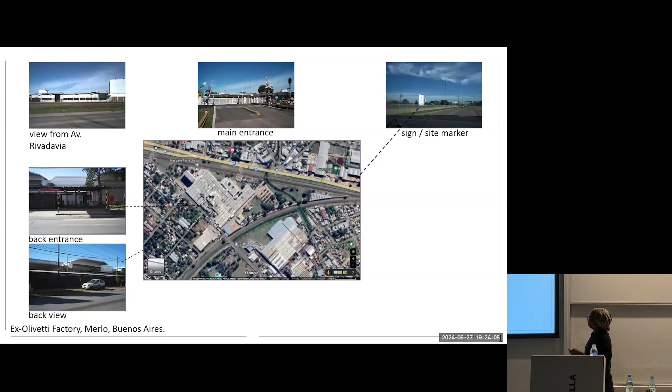And this canopy is part of the original design. So this is the employee's entrance with the bike shed next to it. And these are what we saw before. Just another diagram. And this is the picture of the sign. We found it on the front.

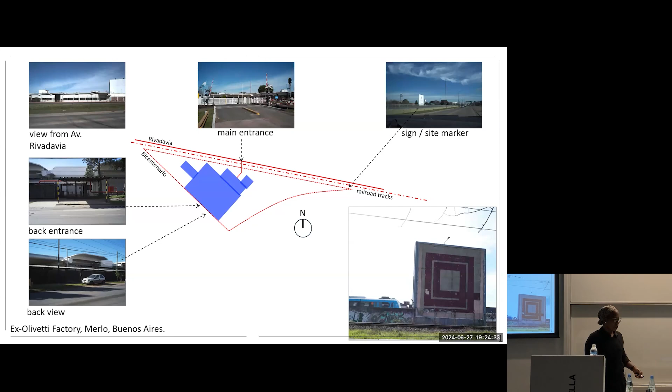You see it's been made into a cigarette advertisement on the back. The billboard is peeled away. You can see the Olivetti logo there again. So I'll come back to that point. So what was Olivetti?

We're talking about a company that was sort of singular, a singularity in Italy. The founder of the company, Camillo Olivetti, was born in the 1800s and established the company in 1908 after attending the Turin Polytechnic and traveling. He came to the US, to Stanford, to study electrical engineering. He had trained as an engineer.

He was also an ardent socialist, so even in establishing his company, he was at the same time meeting with people in the city and working through labor issues. The association of the typewriter they would produce with literacy and the empowerment of individuals was a theme that would run through the entire history of the company.

In 1901, his son Adriano Olivetti was born. He would take over the company in the 1930s. Camillo Olivetti was Jewish. He was from a family that had been in that area since the 17th century, I believe. And his wife was Waldensian, so a small Protestant sect. So they had a very strong religious foundation that they gave to Adriano Olivetti, who eventually became Catholic.

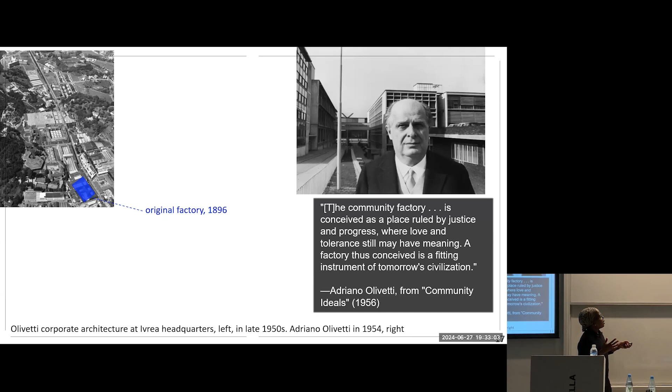This is Via Jervis, which was the street coming from the center of Ivrea and the train station, where the train went to Turin, where the factory complex would begin to grow. So between 1939 and 1962, Adriano Olivetti would direct a series of extensions to the factory, building more buildings. These were designed and built by Figini and Pollini, two architects practicing in Milan, associated with modern architecture.

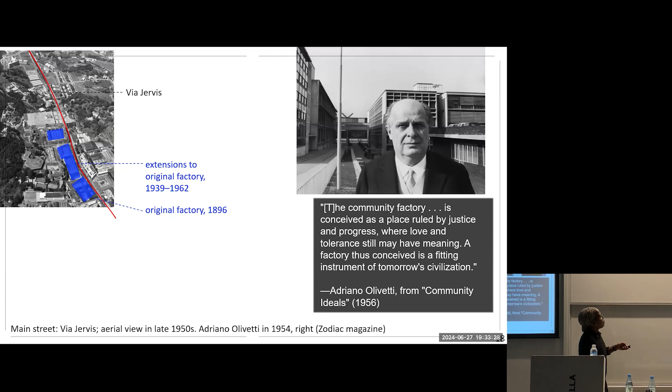But another part of Adriano Olivetti's thinking was that there should be buildings that weren't about production, but had social purposes. So the Mensa, or cafeteria, designed by Ignazio Gardella, a Piedmontese architect associated with the modernism centered in Milan. He was a fan of Frank Lloyd Wright, and so his buildings at this period had this 120-degree angle, and also developed a close relationship with nature. So this was a social space where workers could eat their meals and connect informally.

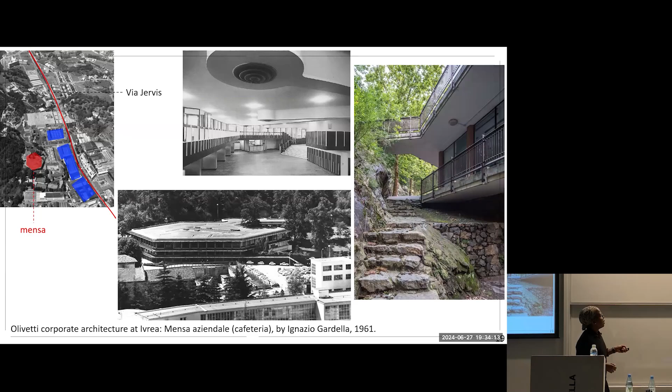In addition, there was a social services building, also by Figini and Pollini, across the street from the factory, and here there was healthcare, health insurance. There was a night school. There were offices to help people if they needed money and a loan or something like that. So it was a kind of service center. And there was also childcare.

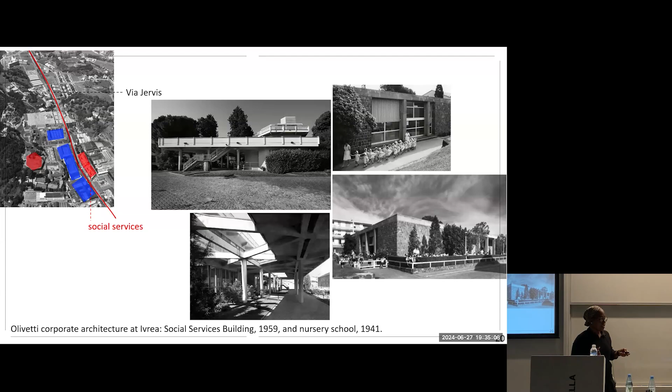Figini and Pollini, the same architects, designed a daycare center, I think somewhere in this vicinity, also not far from the factory. So the model of the Olivetti factory reflected Adriano Olivetti's ideas about community and provided this diverse set of services. And that's important because, at least, the brief for the Olivetti factory here in Buenos Aires would be to recapitulate that condition of support services.

So Olivetti had a presence in Argentina from the 1920s. Initially, there was a branch office in Rosario and agents across the country, and these were importers of the company's typewriters.

In 1932, this new company, Olivetti Argentina, was established. This was a period in which the company was establishing footholds in different places. So Barcelona, in the middle of the 40s, received their own kind of Olivetti headquarters factory. Great Britain, there would be one in England, one in the US, and so forth.

And by 1951, the idea was that machines wouldn't just be imported to Argentina, they would actually be produced here. And so an office was established in Buenos Aires, and they acquired a building at Ramos Mejia, which is still there, according to Google Maps. A single large factory building. This picture actually doesn't show the whole of it. It kind of extends down back in the block. And that would remain a place of production for many years, I think into the 1970s, even as the new factory began to be constructed.

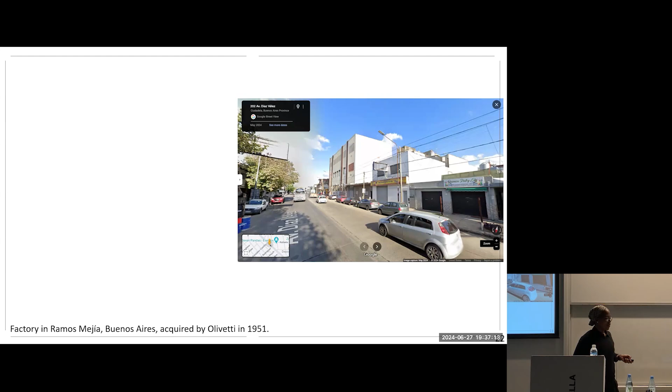So by the early 50s, we're talking about this company with distributors across Argentina and beginning to produce. But it turned out that the level of production was going to be expanded. So it was decided to start producing more, even to produce typewriters that might be shipped outside of Argentina and start to provide other countries in South America. And at the same time, Olivetti also began initiating construction on a factory in Brazil. It was built at Sao Paulo. It's now Guarulhos shopping center, and much altered, but it is still there as well.

So the architect who was brought in to work on these factories, both the one in Brazil and the one in Argentina, was Marco Zanuso. Zanuso had been part of the Olivetti circle since 1949, when Adriano Olivetti had reached out to form a kind of advisory committee with about 100 architects and artists and business people, mostly in Milan, that had meetings in Ivrea and helped shape the company's agenda and objectives. But he was hired to do the factories around 1953 or 1954. According to my research, he was first hired to do the Argentina factory, and then the Brazil one went into production somewhat later.

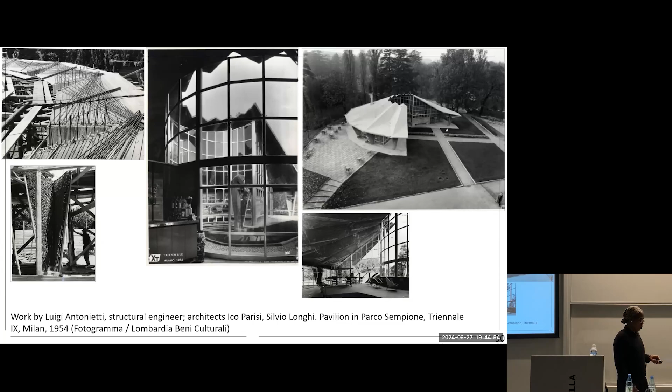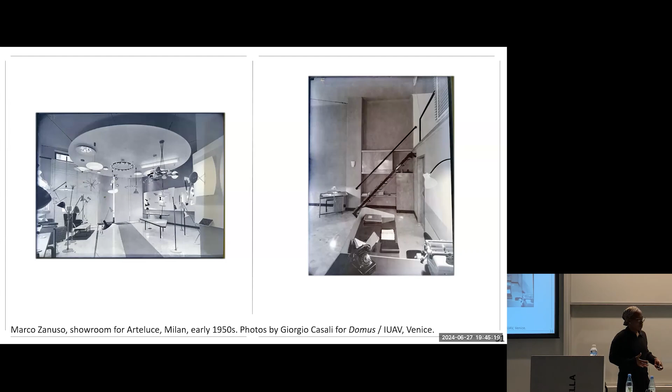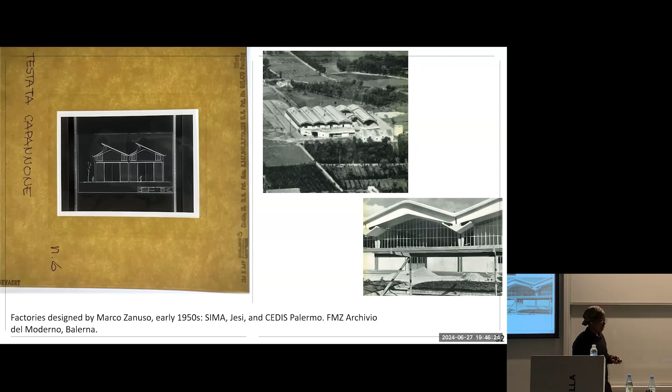And this was, I think, a much more important project relative to this factory in Buenos Aires, the factory for a company called CEDIS, which was a ceramics company in Palermo, Sicily. So when Zanuso came to Buenos Aires, the Buenos Aires Herald featured an announcement that he had come here. Business, it's like a list of arrivals. Architect for the new factories of Olivetti Argentina to be constructed in Merlo has arrived in Buenos Aires from Milan, Italy.

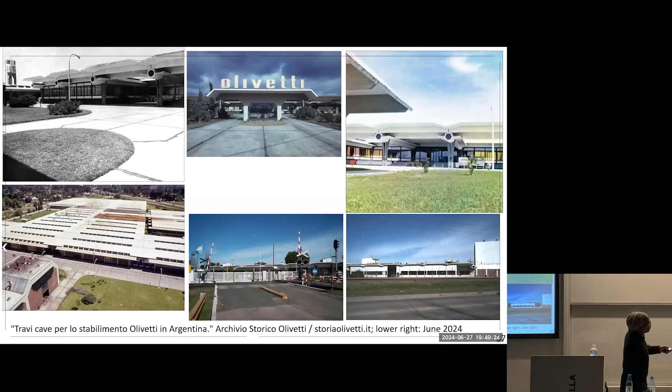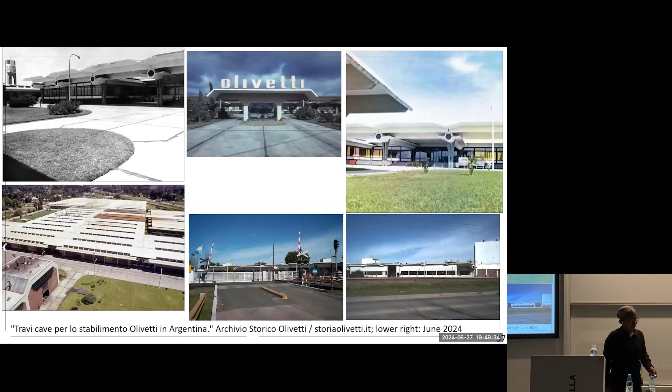And from the sidewalk, it's made of beams, it's on columns. The beams are cantilevered out. So you have this whole roof structure that is cantilevered out over the sidewalk next to it. And that is happening on the ends of this cross axis there. So the entrance here would be out here relative to that photo. And then this view that you can see from the street today is this part of the building down here. The lexicon, which we've seen before.

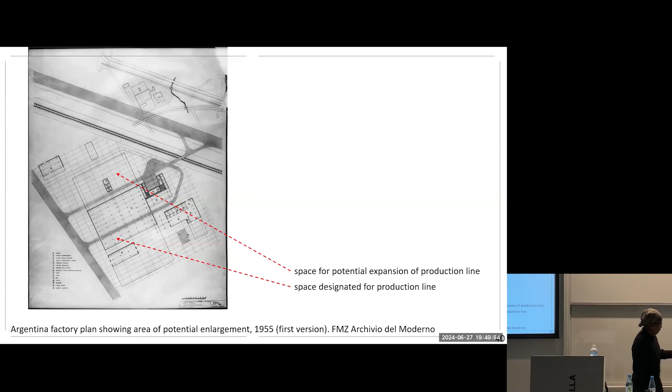So there were two stages of the design for this building. The first one looked like this, and already you can see it's single story. It's very similar to the way it looks now. Let's look at the plan. First, it's a grid, and you see the columns on the grid here. Interestingly, in this drawing, you can see that a grid has been drawn on the site that extends beyond the building, and then the building is kind of plotted within it. So it's unequal. The space between columns is longer along the transverse axis, and shorter on the longitudinal axis. So there, it's plotted out.

And what these dotted lines here indicate, not the arrows, but the lines, is a space where the factory could expand. So one of the issues with the Ramos Mejia building was its size, so it had a maximum capacity for putting in manufacturing machines and people, which meant that you'd reach a ceiling where you couldn't make any more typewriters per month, right? But demand coming from Argentina, coming from across South America, was variable. So the idea was to build a factory that could be expanded. So if they needed more production, they could just build more factory. So that's the principle here.

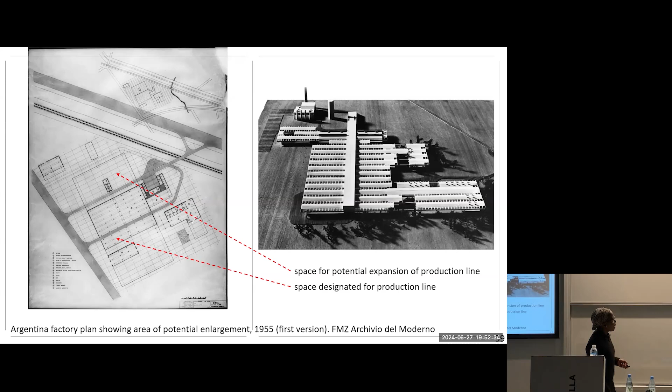So this here on the right is something more like what was built. It's actually not what was built, but it's a late drawing. It's the latest one that I had access to. These are both from the Zanuso archive in Switzerland. It's affiliated with the Mendrisio Accademia di Architettura. It's called the Archivio del Moderno, and they have several architect archives there and critic archives.

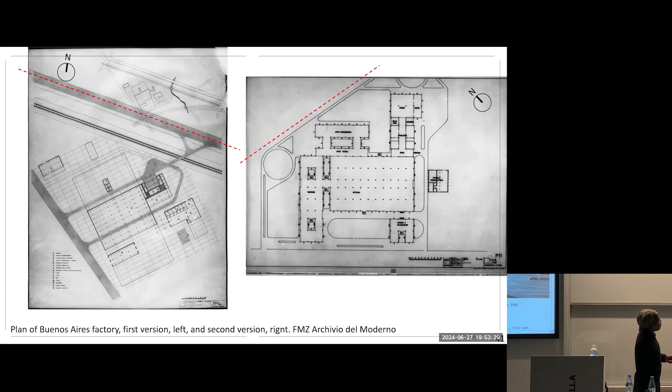So I tried to mark the Avenida because the orientation is different, but you can see the general layout is the same. The entrance is more or less in the same place, but it's lost this sort of head building that was out here. This went away, and that was definitive of the second version. Again, you have slightly different angles here, there. But you see the second version now has those columns we saw in the photographs that cantilever out. This one had a slightly different design.

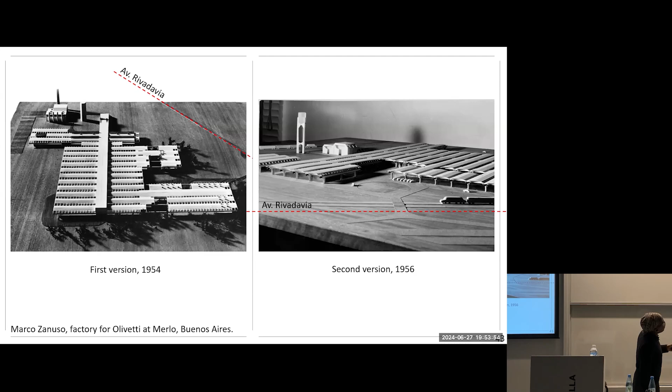And where this building would have been, there isn't one there. There is a thermoelectric center, which would remain. So just as in Ivrea, there were productive spaces and social spaces, to put it in the most simple, schematic way. There were these social spaces that are around the productive spaces.

You had your factory with its dressing rooms, lockers, and administrative offices, and then you had support spaces and sort of humane, educational, and human resource spaces. Similarly, in the Buenos Aires factory, there was a wing that had the cafeteria, it had a library, and there were classrooms among the offices along with the productive space.

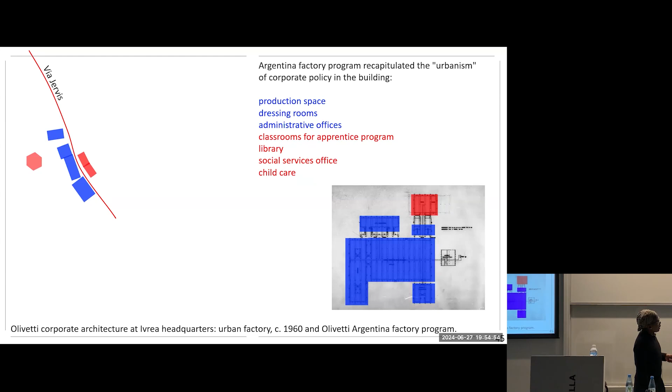Image of the cafeteria, not quite as fancy as at Ivrea, but there it was. And on the other hand, the production space. So this was a rational design. If you're familiar with Italian rationalism, the Italian version of modern architecture, grids, right angles were kind of its signature. And this is a rational solution in which this grid area is used as a space where the machines, the production will be laid out.

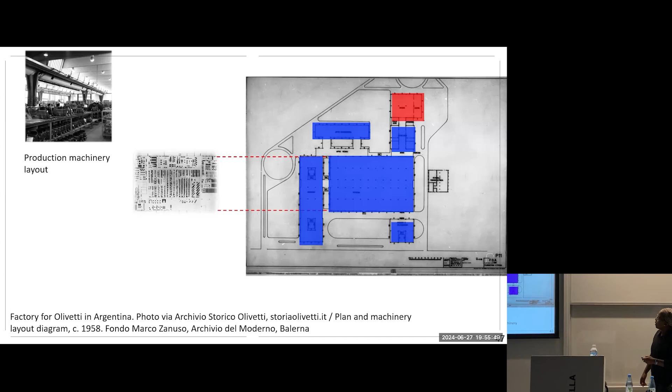So Zanuso worked closely with technicians at Olivetti to understand each machine, its size, its dimensions, the clearance it would need around it in order to establish the dimensions of this space for production. But just as the company in general had this policy of commissioning artworks and cultivating a cultured atmosphere in their shops and their factories, this was no different. And work was commissioned from sculptor Andrea Cascella.

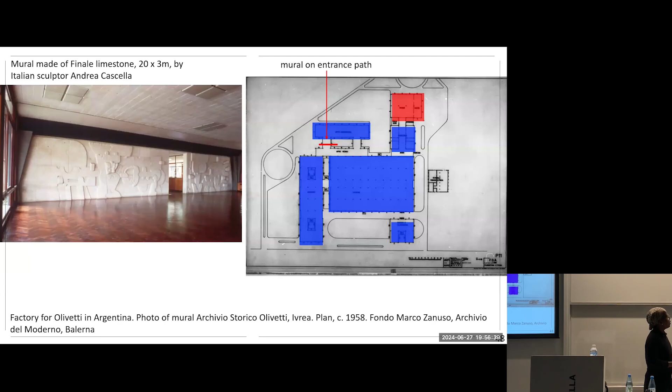It is 3 meters high and 20 meters long, made out of carved limestone jointed together. Cascella was really fascinated by joints, and he loved working with stone and the shadows that would fall on stone and so forth. And obviously this is not a very easily movable artwork, but I think it is actually still there and still exposed to view in the entrance hall there.

The signpost I mentioned before, this logo is the one that was designed by Marcello Nizzoli, also the designer of the Lettera 22 and other typewriters; he was a sort of in-house designer for Olivetti. Very interesting to find in the archive. Actually, I found this long before I saw the actual sign. Drawing showing this thing, which is essentially like a greeting card structure made of concrete, opened out, matching exactly the angle of the site. And there's another one down at this end of the site.

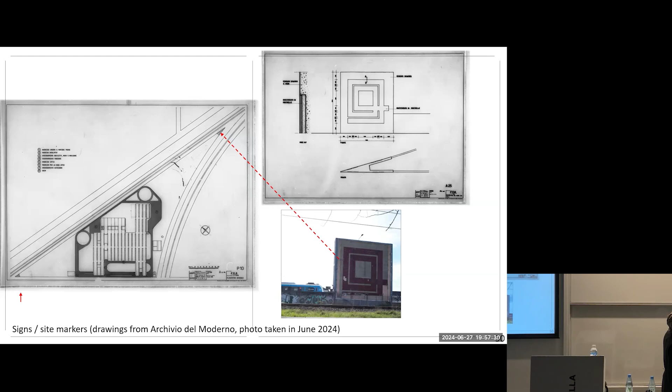In addition, the campus had a water tower. So you can see here the drawings for that, and the thermoelectric center. And these were designed quite differently from the factory itself, as if these were sort of permanent, the fixed part of the factory as opposed to the extendable part.

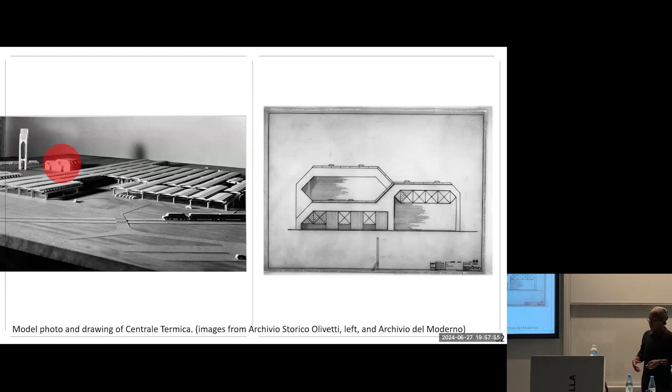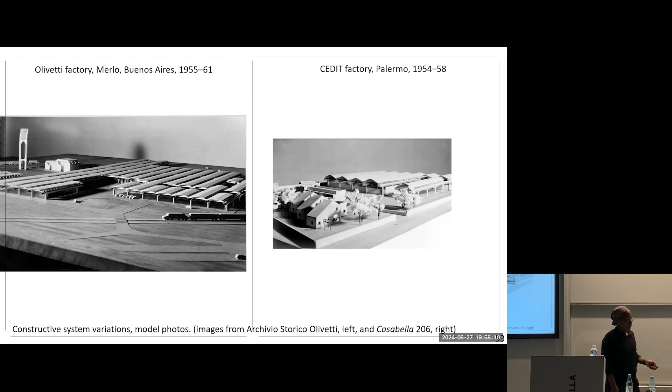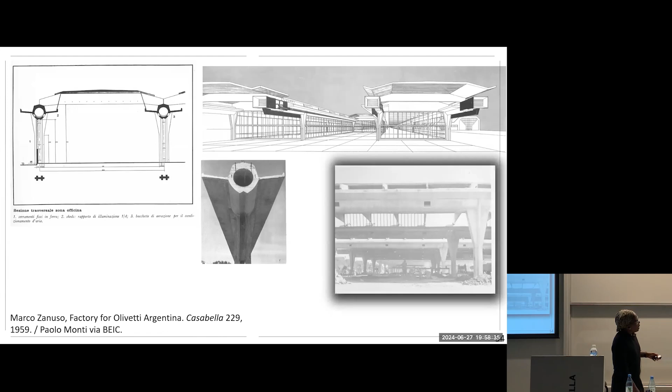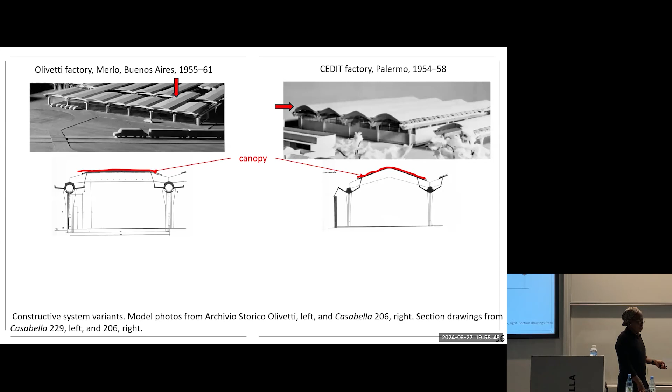So in this respect, the design had very much followed the Palermo design. You had the canopy that goes over the top of the building. You had the skylights; the canopy extended over the glass pane to shelter it, but stopped short of the whole end of the joist, so that light could be let in. At Palermo, it looked like this.

Here in Buenos Aires, it looked like this, skylights. The joists, a rather flat joist versus more of a pitched type shape. It's just a slab of concrete, cast concrete, sitting on the beam. So the joist sat on the beam. The beam had this shape to accommodate the joist on the top. Here's the joist and the beam.

Palermo. So you have this system: canopy, skylight, joist, beam, column, and of course the slab. At Palermo, there was a sort of outer wall. You see here, not in Olivetti, but here in Buenos Aires, the outer wall would be a panel in between columns rather than sitting outside it, at least in the second version. Just details of that.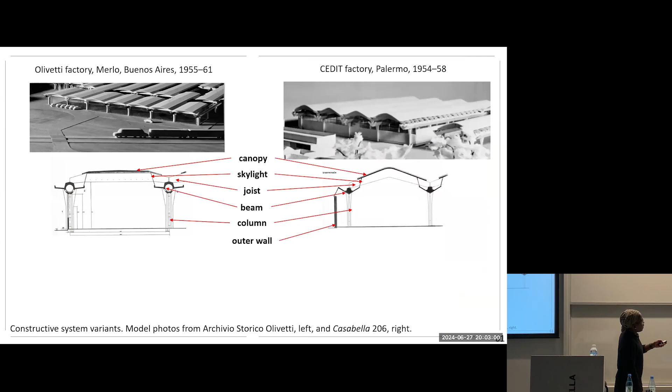And instead of having that outbuilding that would have had to be rebuilt, that was meant to blow air down the entire length of the building, instead of having that one giant ventilator, you had many small ventilators, one at the end of each of these beams. And here they are in this photograph here.

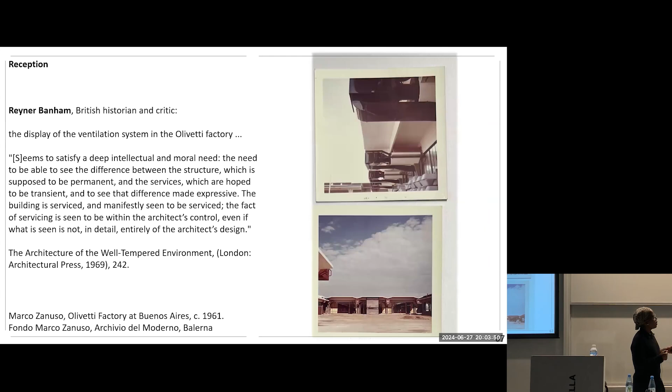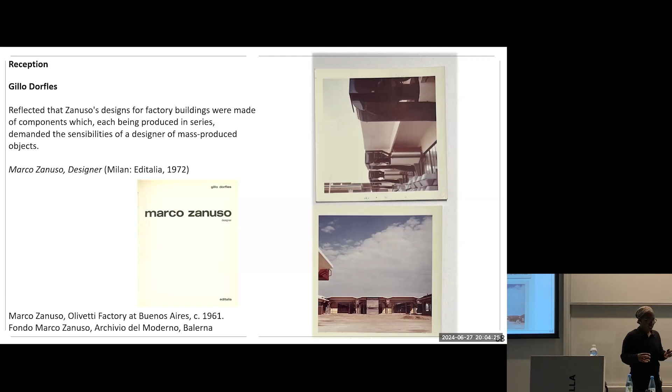So Gillo Dorfles, the painter and critic and historian, wrote a monograph on Zanuso, collected images of Zanuso's televisions and sewing machines, and included a chapter on factories like this one, where he said essentially what you see in this building, referring to this extensible part made out of the system, is a kind of industrial design of building parts. And so these are like many industrial design projects bundled together in this building.

So I think all of these provide a rich point of departure. And yet I feel, for example, in Dorfles's case, this needs to be developed a little bit. But I also think it's important to be able to talk about this building as the artwork of this architect, right? This was a time when architecture was still talked about as one of the arts, with painting and sculpture, and there was still an emphasis on the visual experience of the architecture.

So part of what I think needs to be done is to dig in a little bit to this: what is it that we're seeing and what is the effect on us of what we see? And also, what did Zanuso want this building to be? What was the sensibility that he brought to it?

Now, he often tended to write about his projects like how I solved the problem. That seems to have been his favorite theme in his essays and texts. And he did participate in conferences and talk about other topics like color, how should we use color, but very pragmatic in his ideas, except at the very beginning. There was some theory, which I'll come back to.

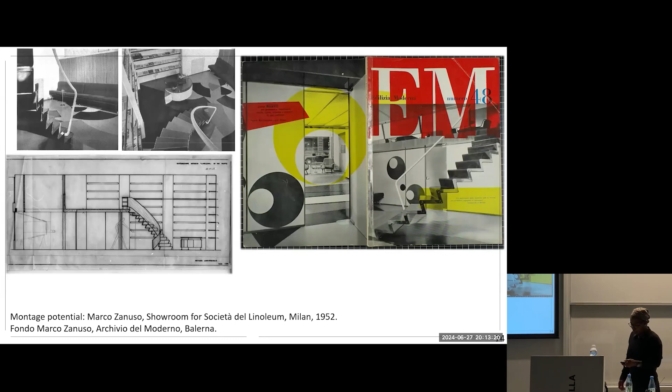And even when the project was published in Edilizia Moderna, Albe Steiner, who had also collaborated on the vitrine here, did the layout. And so you see he even starts to play his own game. So this is the part of the magazine, this is the wall pattern, and yet they're able to create this interlocking sort of multi-layered work. And I think this is important to understand the sensibility Zanuso would bring to industrial projects as well.

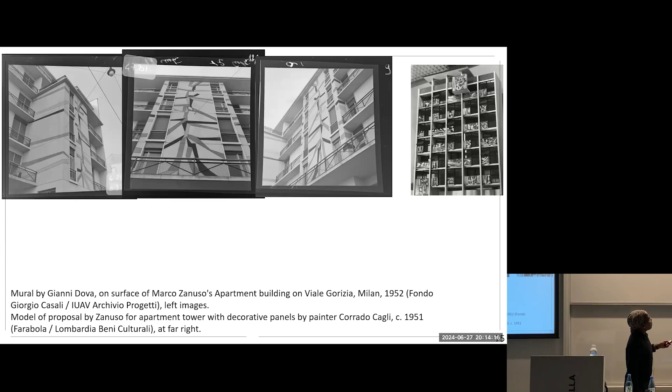And this was a proposal Zanuso had made with another artist in the 1950s. So he was at that time really intensely involved in experiments with integrating different kinds of works together. This actually is standard railing from the canal edge in Milan nearby that they appropriated for the balcony. Okay, I'm in the home stretch here.

So the concept that I'm working on and sort of trying to work out as a way of dealing with the Argentina factory is automatisms. And this comes from the philosopher Stanley Cavell, he wrote about the medium of film. And so I'm going to talk about three types of automatism that Cavell writes about.

He said film gives us the experience of a reality that we're not actually part of, like a whole world in which our own desires are not in the picture. So we can enjoy film because we have nothing at stake. When we watch Buster Keaton or any kind of Nanni Moretti film, or watch a movie, we're not in it. We're watching passively, in a sense. And that's part of the pleasure of film. What film does for us automatically is part of why we like it.

And then there is sort of automation within film, how you have photography and the 24 frames per second that give you movement. So on a number of levels, film is automated, and our enjoyment of it is an appreciation of that automation. In a way, he's talking about the medium of film. He chooses automatism to be a bit more specific about this type of pleasure.

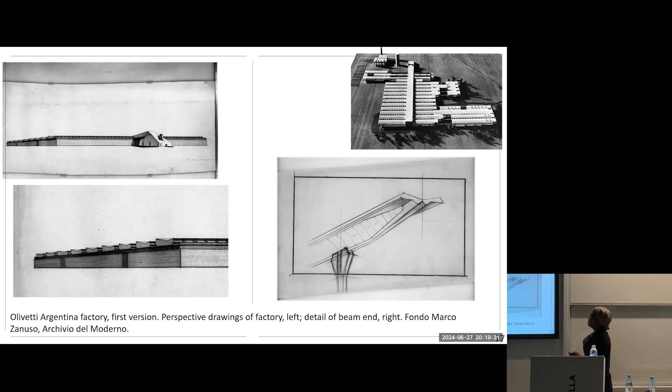you see the beam in this case. It had a cantilever. It sat on a column. It cantilevered out, and then there was a wall below it. So these windows, which are unbroken, are kind of existing within the zone between this freestanding wall below and the cantilevered canopy above. So there's a certain ambition, a tectonic ambition, to quote one of my professors, even in this early scheme, although I think the expression is a bit much.

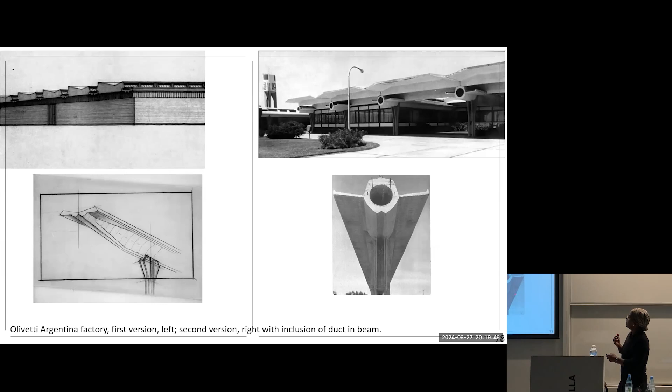So to contrast the two, what's different here is that the opening for the duct has found a home in the beam. It's gone from this kind of beam to this one. And there are a number of traits that this project had in which you can see these kind of details from engineering that have been incorporated here. There's a flange, the tube, of course, structural tube,

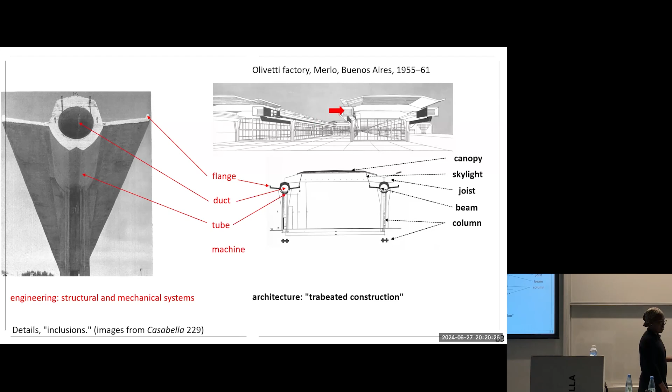and there's the duct. So these are all sort of objects that have come from outside, let's say, architecture in the sense of form making and space making. And yet Zanuso somehow is able to make them seem to fit within the architectural whole. The machine that blows the air, another inclusion, one could call it.

And there are ways of drawing that Zanuso had to do in order to communicate with the engineer, to communicate with the construction team. This alignment of centers is native to mechanical engineering. And you can see even in the architectural drawing, I'm not sure what this is, probably an engineering drawing. This is definitely an architecture drawing.

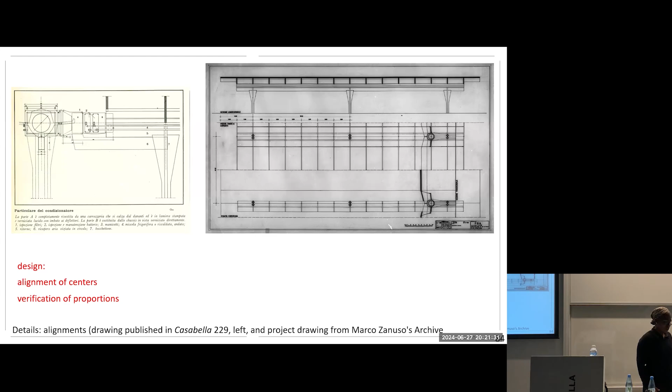And even here, they've sort of laid down the beam, turned it sideways, created this way of drawing the beam so you can see the section and the underside of the beam in the same drawing and the plan. So they're starting to draw the building the way you might draw a car or another object.

There's also a certain use of symmetry and axiality in the building. So this is one unit. It's a long tube, machine at one end, duct-like openings along the sides, but also this final opening in the middle, column, column, column. And these are lined up to make the building.

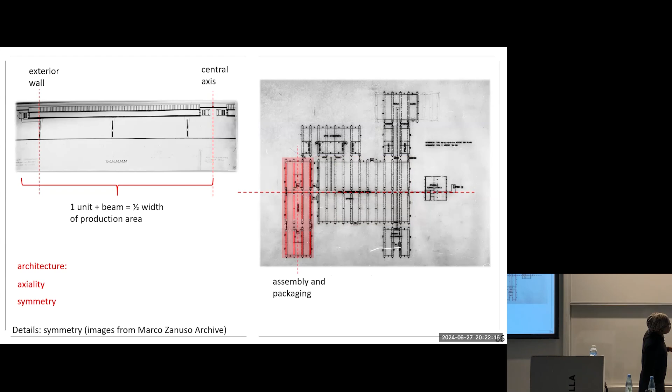So constructing a bay is to construct two of these. It's double loaded, let's say, across an axial center line there. That's the production area. Assembly and packaging has its own central axis. Social services wing. It's all governed by symmetry.

So this is essentially where I'm at, to say that Zanuso was able to produce the design that we know by, in part, absorbing the automatisms or the defaults and necessity of other disciplines into his designs. And part of how he did this was to draw on traditional architecture, symmetry, axiality, in order to make a coherency in the building, even when it had these inclusions that came from outside.

And that is where the formal language of this particular building emerges from, and it remains rooted in the industrial setting. This is where it originated, this is where the forms came from, and this characterizes the building that he made. Even as some other of Zanuso's projects look a little different and may not foreground this particular issue quite so much as this factory does, I think that's part of why the Buenos Aires factory is so distinctive.

Here, just three parting examples: the Palermo factory again, the Buenos Aires factory. These machines have been taken off. It's been quite modified. These have been filled in with the soffit, but this is what the original design was. And this is the factory that Zanuso designed after Buenos Aires, another variation, with the ducts on the roof, but a similarly trabeated architectural system.

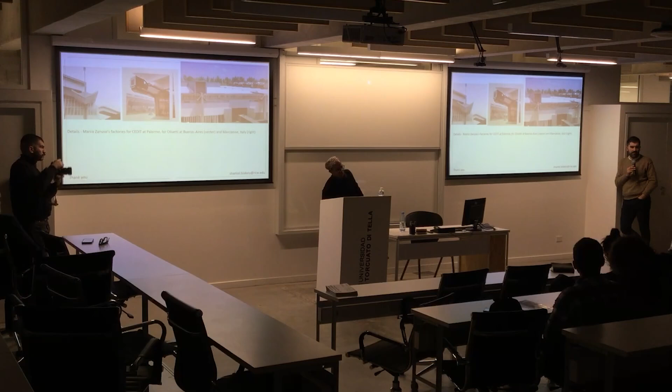I had two comments or two questions. The first one was, what were your thoughts on, I didn't know the first version of the factory with the centralized ventilation machinery or architectural piece. And I found it quite interesting that the project went from having one centralized facility to a lot of individual pieces that were part of the system, like a way of disarming a technical element. What were your thoughts on that?

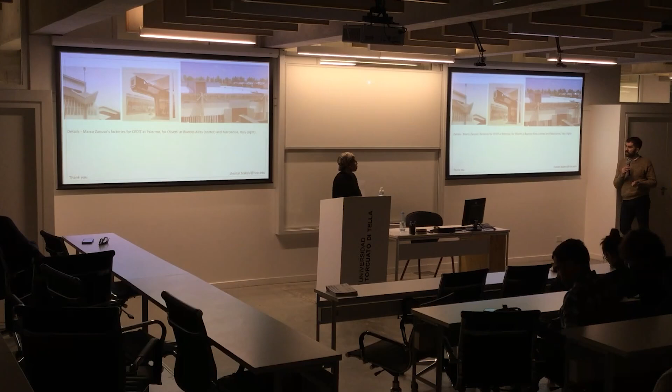Then I was wondering, the talk was very focused on Zanuso, on the factory and the reception, and what Banham said, and so on. But what was the state of the art for this architectural problem in other factories, in other architectures? Was it good to put a ventilator inside a beam and do a duct inside a construction system? What were your thoughts on that as well?

Those are good questions. I think the first one, the insight is just that by making the ventilation sort of serially producible, part of it is that they had developed this kind of cybernetic technology for managing and coordinating the ventilators. So one thing they were able to do was adjust the temperature in a certain part of the building by firing up those ventilators over there a bit more, while keeping another part, maybe needing more cooling or something like that.

So I've read that was considered to be a kind of achievement and advantage, but also just, when expanding, to be able to calculate exactly what you will need. We just need 4 more bays and 4 more ventilators, for example. I think it's just operationally effective.

I don't know much about, let's say, factories around the world. I think a kind of reference here is Robert Maillart, like his railway canopy at Chiasso, which maybe in structures class many people still are learning about. And of course, not so much Nervi, who seems to be kind of an outlier, which is kind of a pity. But like Mattè Trucco, who designed the Lingotto factory at Turin for Fiat with the test track on the roof. I think uses of concrete like that were in vogue.

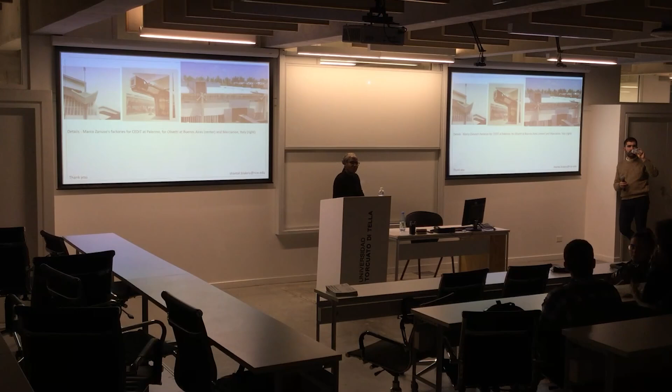And secondly, in a broader picture, how should we look at all this constructed mass from already decades ago? Latin America is a very great example because we have a lot of industries and offices.

Yeah, I mean, both good questions. And I think you could even go further, something I think about a lot, as to your second question about the mass. David Harvey said a few years ago that the amount of concrete that has been poured in China in the last 20 years is more than the entire history of concrete. So it's hard not to look at this project now from what we know about the environment and the land.

All I can say is that at the time, it was still the kind of romantic notion of the hinterland, the new world, and this blank slate where there were seemingly endless resources, and we just had to take advantage of them. Unfortunately, that attitude was still standard. But then if you look at the population and the extent of the city when that was built at Merlo, there was nothing around it. You see pictures and it's just like desert. So you can understand how they must have felt that they were on a frontier.

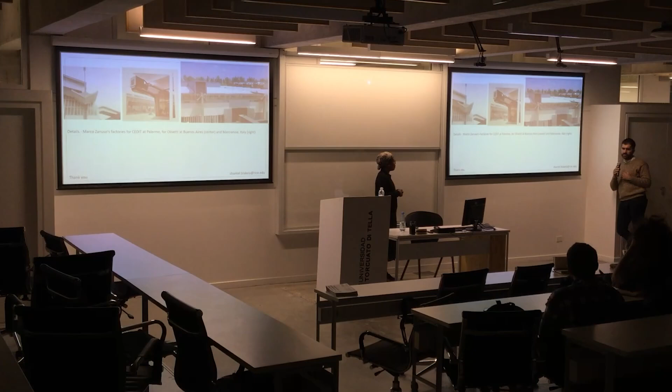So thank you. I wanted to ask you about what you're mentioning about the Pompidou. I was thinking of other examples, and also taking you outside of your comfort zone as a historian and someone actively engaged in architectural discourse. All these days we haven't just talked about history, we talked about contemporary architecture and architecture from other centuries, so you know a lot of what's going on in the discipline in the last 20 years. Something that surprised me in all these images you've shown is the level of expressionism the structural design had.

So like the level of detail and the angle and the shapes, it didn't look well. Aside from that, what is fascinating is this idea of, is there an aestheticization of the thermomechanics of the building?

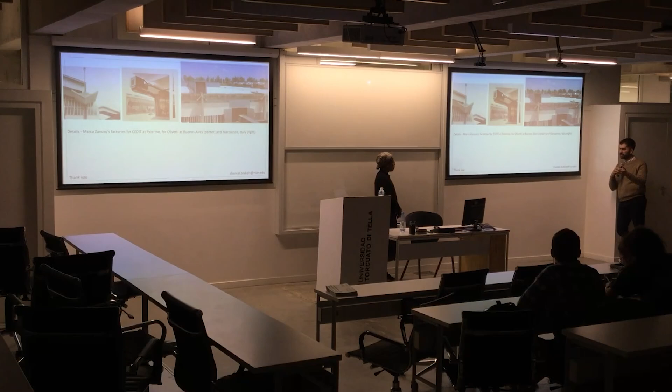Okay, designing a structure as an architectural problem, and we can see the shape of a column, the shape of a bridge, you were speaking about that before, but plumbing, air conditioning, and so on, that's something that appears in that decade and in the decade afterwards, and it was something discussed, an argument of the time, and some people said, okay, plumbing, thermomechanics, and so on, that's not a problem of architecture. Architecture is structure, roof, sidings, and so on.

And that's a problem that comes and goes in a way in architecture. We're seeing it again, right? We're seeing again buildings that try to have this revival of the Pompidou effect, not just trying to show the bones of the structure, but also show the organs of the building. And at the same time, when we went to see the building, it was strange because that part, the fascinating part that made the beam hollow, it's the part that doesn't work anymore.

So it's the moment when architecture wants to catch up on technology, but sometimes it's difficult to catch up because, I don't know, air conditioning units change and it's not part of our discipline. But I wanted to ask you a little bit about what you thought of that topic and how it kind of comes and goes in architectural discourse. That's interesting.

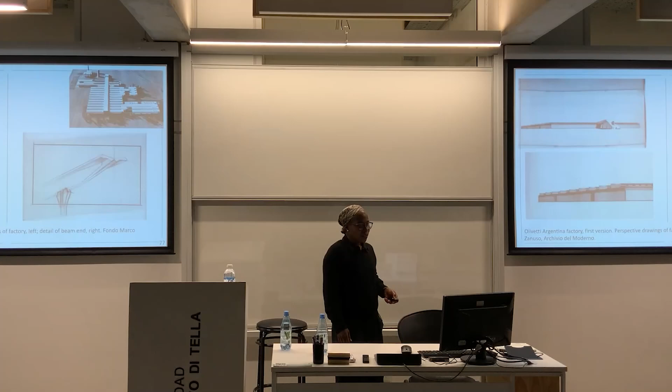but they're gone now. But on the roof, they've got all these new pipes, new big metal ducts that you can just see, and also some ventilating machines just randomly on the roof. So maybe they think they're invisible. Maybe they don't see them somehow. But I think maybe it's a question of deciding, okay, we don't want it on the front of the building, but we'll tolerate it on the top of the building.

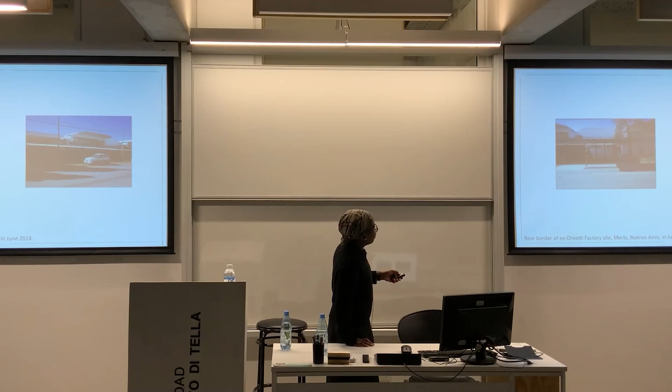I don't know. Let's see, I'm just trying to get back to one of those pictures of the original. There. So here you can see. Yeah, that was another. But I think you have better pictures. There, yeah, the caps of the beams, capped beam, and you can see the canopy that still extends out, even though there's no machine there. Here you can see. They're willing to put up with this. You can see them on the top, and in the aerial view, you can see them studding the top.

So yeah, in a way, maybe it's the retreat of boldness in showing the machine. At the same time, a kind of laziness, like, oh well, or maybe a new default that is not so desirable, where they are willing to put up with the sight of them on the top of the roof.

You know, in Houston we have a building at the Menil Collection by Johnston Marklee. It's the Drawing Institute, and it has a courtyard, kind of like an Italian domus, ringed. It's a shed roof in a way that slopes down toward the center from four sides. And it looks like it's flat. The architects conceived it as this pristine set of planes.

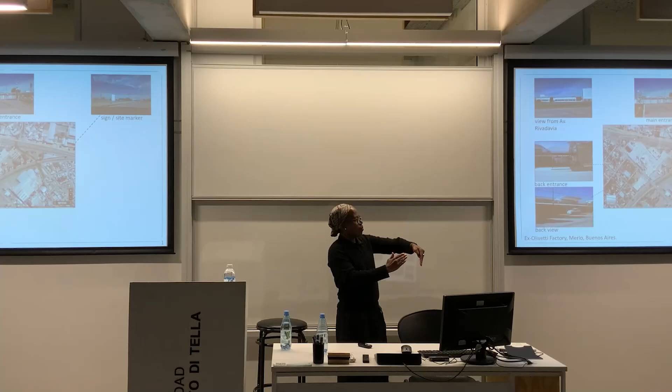And according to the engineer, they're not so happy with how it came out because since those metal panels are sandwich boards, kind of like corrugated cardboard with two sheets of metal and struts between the two sheets, the metal has started to sag between the struts. So when you look at the underside, it's wavy. And apparently the architects are not happy with that. So the assertion of gravity and the real, architects remain ambivalent toward that.